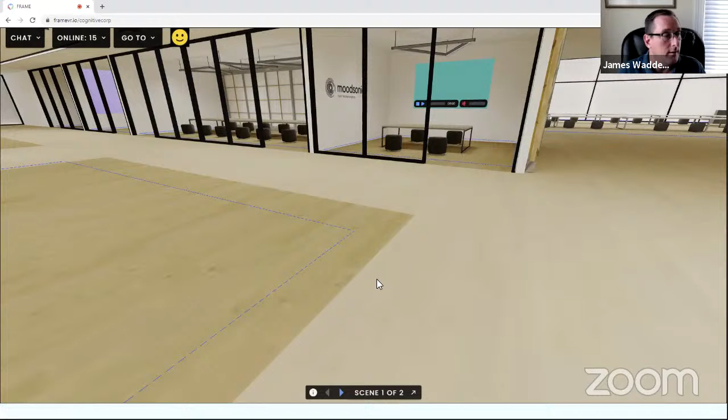Your W, A, S, and D keys are your bestest friends in the whole wide world. What they will do is allow you to move about the space. When you see videos, the videos might be auto playing, and there might be some presentations on the wall. Those are group videos, so wherever they are, everybody sees the same thing. But to hear them, you have to go into the room and unmute the video so that you can hear it. You personally control the video that you hear. If you were to leave that room, you would still be hearing that video, so make sure that you mute it before you leave. Oh, look, I can see myself back here. That's pretty cool. I'm going to sort of randomly go around here and give you a sense for what's happening in each one of these spaces.

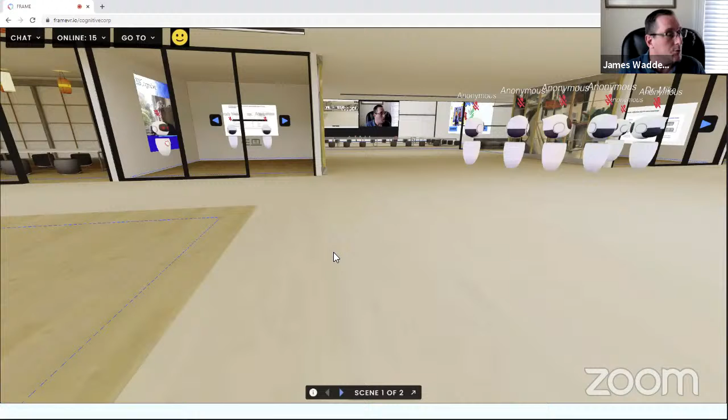You will notice that there's blue lines in our model. These are acoustical boundaries, so that if you're inside that box, you are contained in a privacy bubble. If you're having a conversation in there, you shouldn't be able to hear what's happening out here. The folks who were just in our meeting quality room probably couldn't hear what I was saying because you were in the acoustical boundary. Anything inside that blue box, when you're inside it, is basically a privacy zone. So as you're having a conversation in that space, it doesn't affect others outside of that.

Let me give you a sense for this meeting quality space over here. Meeting quality is a software as a service that is wholly unique to Cognitive. There's a cognitive version of meeting quality that allows us to monitor or quantify the effect of remote work, and subsequently hybrid work, on our projects, our teams, and our individuals across a number of different dimensions. Not the least of which would be employee engagement, project risk, and team cohesion - how is the team working. Employee burnout, sustainable productivity - these are all things that we can get by using this service as a software as a service.

Now, when you apply that to location, what we're able to find - and we're in the midst of a very large scale research project - we'll be able to determine how much remote work is affecting our ability to bring in projects, and to quantify the effect that has on teams. And then subsequently, when we're back in the office, or maybe we're in a third location such as a coffee shop, again we'll have the ability to quantify the impacts that has on team dynamics and project success. So we're very excited by that solution.

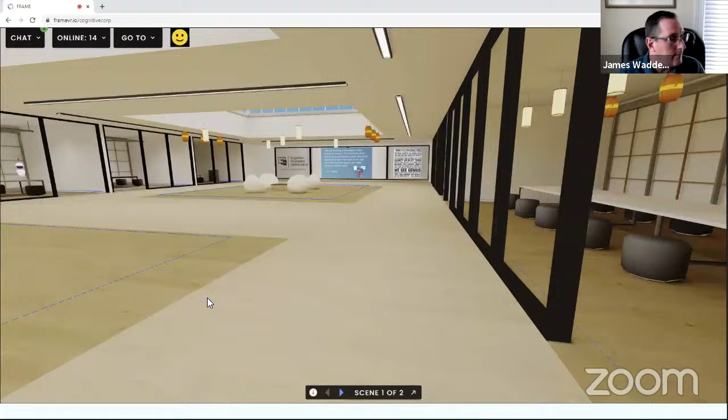If we head on down over here to Envoy - Envoy is a very interesting solution set. It's a very big solution set, primarily intended to help you with managing your teams that are in the office. There's applications for check-in, employee check-in, guest check-in, Wi-Fi access, desk booking, services. It really is a singular platform that you can deploy to help in regards to your employee experience or occupant experience in your facilities. We are a partner of Envoy, and there's some very interesting things to be had there.

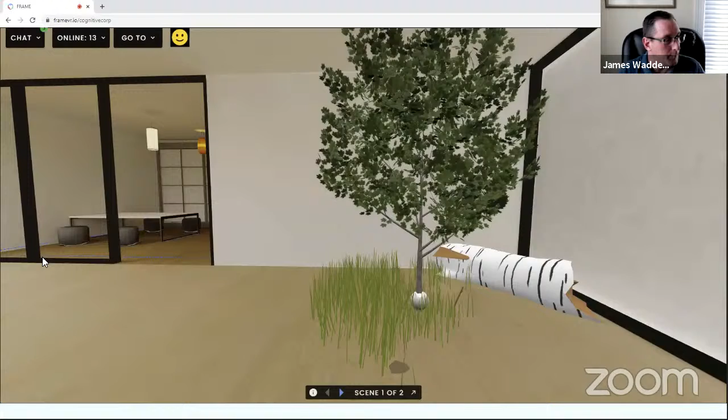MoodSonic, as we head down here - I can start that video there. MoodSonic is a solution that allows you to bring ambient sounds into your physical space. Right now we're working with them potentially to bring this into the digital space. That's proven to increase productivity and relaxation and improve your mood. One of the interesting demonstrations of that is if you go all the way down here to where this tree is, you'll be able to hear some nature sounds as an ambient sound, and it becomes quite relaxing at times. This is actually where I spend most of my time, down here at the end of the space. You can kind of hear a little bit of bird song in the background, and that makes sense because you can see a little bit of a happy digital tree there. So that becomes very interesting, I think.

I'm going to check chat here real fast. Team dynamics measurements would be incredibly valuable.

We've never been able to quantify that outside of a survey. You know, it is interesting, there's a couple of ways to do that. Ultimately, it is done via survey.

What we have done is we've partnered with Meeting Quality, and we've built a 45-second or less survey—ours takes much less than that. It's generated at the beginning of every project meeting, assuming the project has a longer time frame, recurring meetings, and a defined team. By issuing this survey of about 4 to 5 questions, we can show trends over time relating to your own perception and others' perceptions of your contribution to the meeting. That's how we define the team dynamics piece. There are other ways to get that data, but this is the easiest, lightest lift, fastest way, and it's proven very effective.

There's another question in chat saying it's a little difficult to hear other people. There's spatial audio in here, so the further you get from the talker, the further away the voice sounds—unless I hit this big megaphone, and now everybody can hear my voice as if they're standing next to me. For everyone down on the other end, I wanted you to know this digital twin, this metaverse, has spatial audio, so the further you are from someone speaking, the less you'll hear them. That's how that piece works.

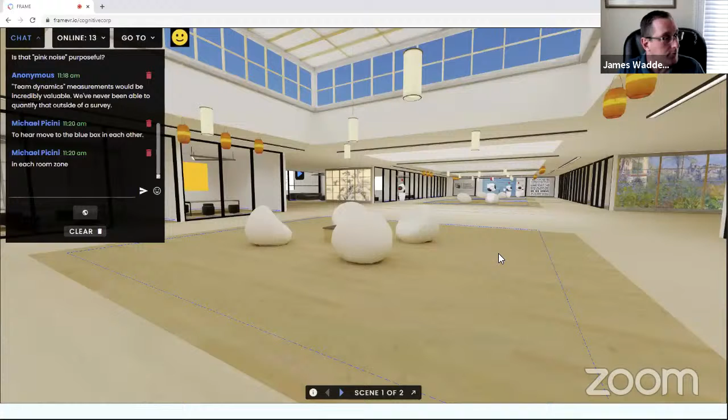I'm going to scoot over here, zoomity zoom zoom, and stand right over here. There's a really funny video in here, which is our commercial, that everybody's got to take a peek at. I'm just going to let you guys explore—that's it in a nutshell for us.

I really want everyone to have an opportunity to explore Meeting Quality. I honestly, truly believe this is the solution everyone's asking for right now: how are the teams doing, what's the risk to my projects now that we're in an extended period of remote or non-in-office work, and is that having an impact on team dynamics and our ability to bring projects in? I can tell you, based on early data from our research project, it is absolutely affecting project delivery. Remote work, working from home, is absolutely affecting our ability to bring in projects—there's no doubt about it, and it's negative in its effect.

How would we interact with someone who's physically in the space? We are working on that. Right now, in this version of the metaverse, there's not the ability to bring a physical person into the digital universe unless they're an avatar much like you. That is very close to the next generation of the metaverse—they'll be brought in a little bit ghosted, like a video of them, and placed at the desk where they're sitting, so you'll be able to see them and they'll be able to see you in the virtual world. It requires some technology that's a little bleeding edge right now—you can see some of those demos from Oculus and Facebook.

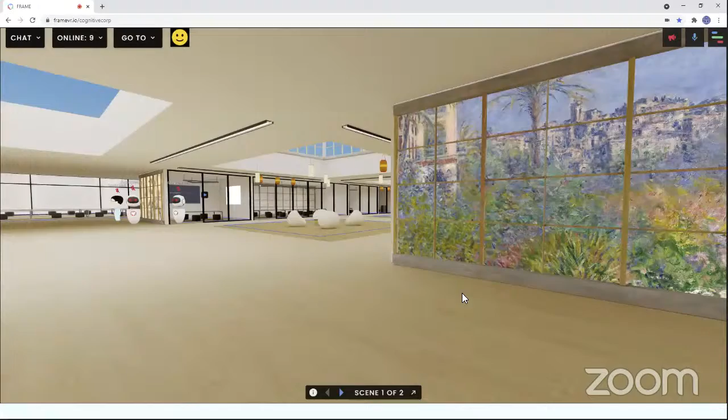From the main hallway you can see four pieces of art. I'm very hopeful those are part of the Creative Commons license to use anywhere, but they're also pieces of art sitting in museums at the moment - real pieces that the museums have digitized and made available for public consumption. We've brought it into our model. If you get really close you can even see the brush strokes and the height of the paint on the art. That opens up a whole different, confusing world related to NFTs and non-fungible tokens and buying digital things online. I don't want to get too deep into that, but it's an example of being able to mirror the type of artwork and decor you have in your physical space in this digital world. There's really not much we can't do.

I even have the ability - I'm going to try it right now - to bring in an actual 3D camera photo shoot of a piece of New York City. I'm going to go down here where that tree is. It's heavy lifting for this thing, so hopefully everybody doesn't get kicked out. But I'm going to do this in near real time, I think. Maybe. Yep, here we go. All right, give me a second. Building, processing. Oh, it worked.

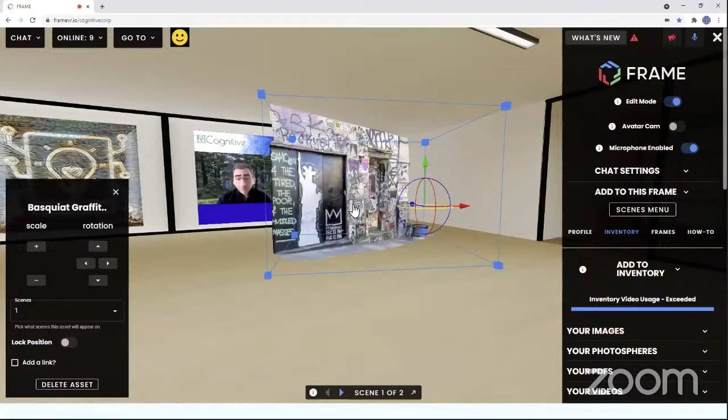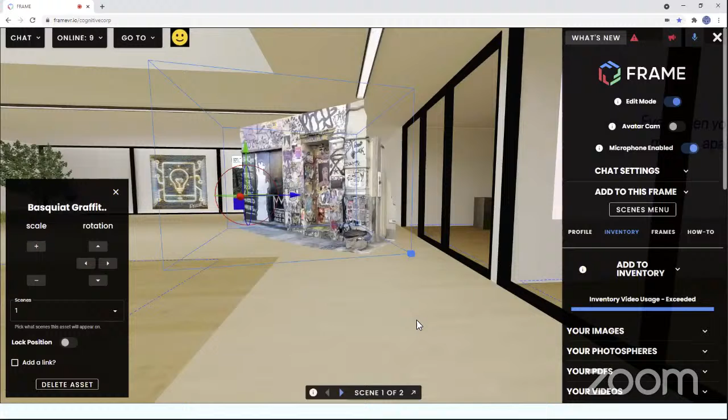Look at that. So if you guys want to experience a piece of New York City, I got it right down here for you. It was simply brought in as a model directly from New York - just a photo shoot from a 3D camera in that space. I've got to position it. That's probably good enough. There. That's pretty close. Normally I'd put it in the corner over there to make it look a little better and not block those offices, but there - you guys get a sense for what that looks like.

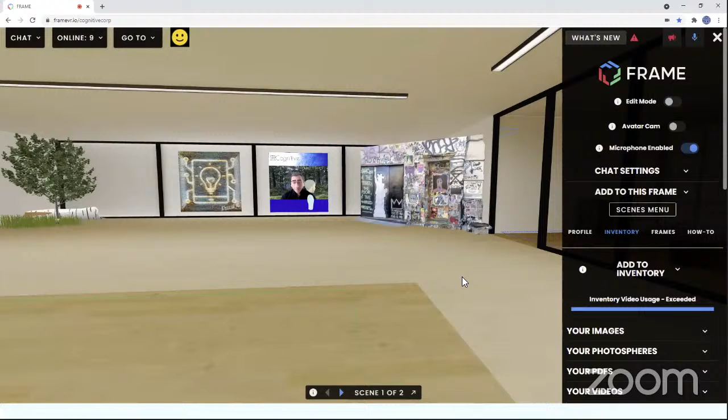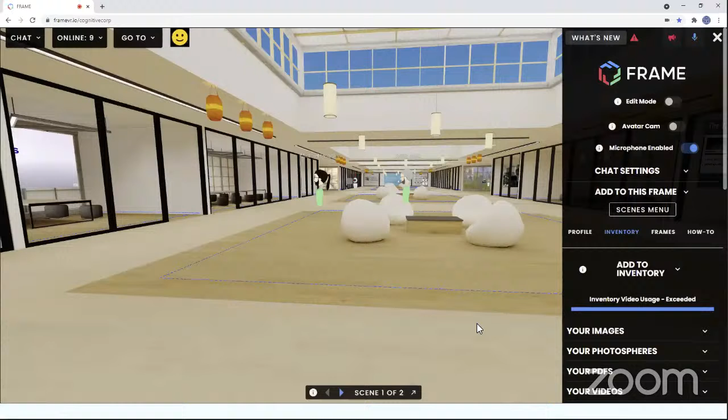Hey James. Yeah, sure can. How you doing? Doing quite well. How are you? I'm fine. What do you think of this? Is this your first time in a space like this? I'll be honest, it's my first time hosting a meeting in a space like this. Oh, sorry Michael, were you over here, bud? There we go, sorry, I stepped out of the acoustical boundary. My apologies - my first time hosting a meeting in a space like this.

How do you find it? Sorry James, I'm not sure who you are - who are you working for? Are you representing one of the organisations? Oh yeah, no worries, I apologize, I should have done an introduction. I'm just so excited to get into the tech. I'm James Waddell, I'm an executive vice president here at Cognitive, I manage our services organization. You'll also see Mike Piscini running around a bit - I think Mike's just to my right, if I'm not mistaken. So we both represent Cognitive here, and that's who we are.

Okay, and you said this is your first event using this technology, correct? So you've used other technologies. What else have you been using then? Well, from a cloud-based perspective, from a metaverse perspective, we've tried many of the technologies that are out there. We can't say we've tried them all, but what we found so far is Frame VR is what we'd consider leading the class in browser-based metaverse capabilities. Most of the others require downloads, which isn't bad - you get greater functionality from downloads - but most of our corporate customers won't permit downloads of that nature, but they will allow this type of browser-based interaction.